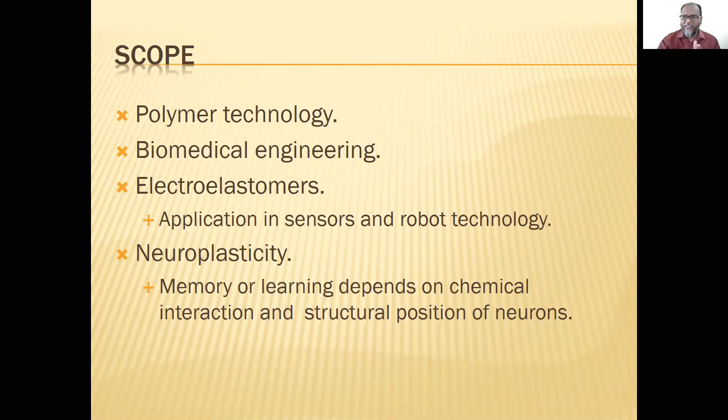How it is going to be is, suppose - actually it has been said that if you train yourself, suppose if I take a flute and play, that means we are training our mind. So short memory depends on chemical interaction of the two neurons generally. And actually the long memory depends on the structural change of these neurons. And imagine billions of neurons over there.

Nowadays I read one article that scholars and researchers are capable of tracing 200 neurons, whereas there are billions of neurons. Suppose if at all we have a model, it doesn't matter what kind of force is taking place - the force may not be mechanical force, it may be a chemical force or some kind of force. You have to understand what exactly is happening.

And then in 200 years, understand that we may reach to the Mars - now we have already reached. Maybe from here, 50 years after, when the capabilities of computers rise, people can model this very simply.

So what I'm going to say is that the structure changes. So if at all we are capable of modeling this structure, immediately we can define how a man thinks, how memory works - we see so many advantages over there. Of course, we never get the advantage to find out the right thing. That's how modeling is what we call dominating.

We mechanical engineers nowadays are no more working with bolts and nuts. That trend has changed - now we are entirely entering into the medical domain. And if you invest your time properly, take it from me, you can reach a good stance. But only thing is, enthusiasm must be there, and proper atmosphere must be there. Yeah, with this, I would like to start my what we call thing.

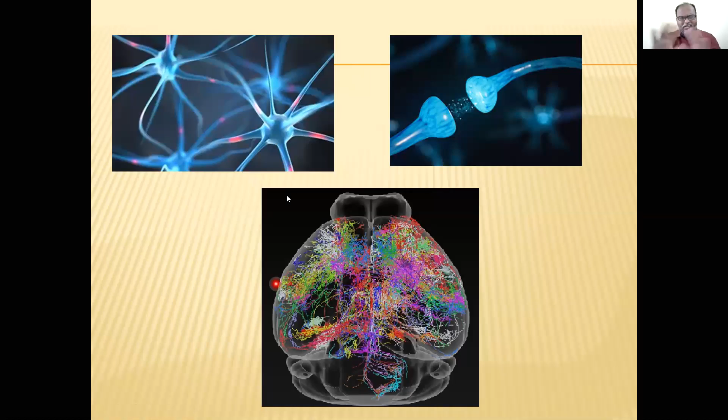Let me recall some basic strength of materials so we have that glimpse, and the preliminaries of continuum mechanics. I'm not going into the in-depth of continuum mechanics, but I will give the necessary information required for the modeling, and the introduction to nonlinear elastic material, where it is going to be, how to model.

The major task in this entire seminar is going to be how we have to model, and what are the formulas to be used. Of course, at the end of the day, people depend on the formulas, and what elementary precautions we have to take while modeling. Those are all I'm going to do.

I will use a little bit of code for modeling. I will give the code. Modeling platform you can take in any platform, either you can model in MATLAB or what we call LS-Dyna in console. Whatever programming language you are good at, you can use that. But the code is going to be the same. This is my code, it's not like you cannot use your own.

I had given some initial statement, and I will give the literature survey, a small glimpse of how to do the literature. Most of us at our graduation level, BTech level, have not been taught how to do a literature survey. Of course, if you've done your PG at NITs or IIT level, that would be entirely different criteria, you don't need to listen to this, you can do it yourself. But here I would like to give a little literature survey. I guess these points are good enough for us to discuss for an hour.

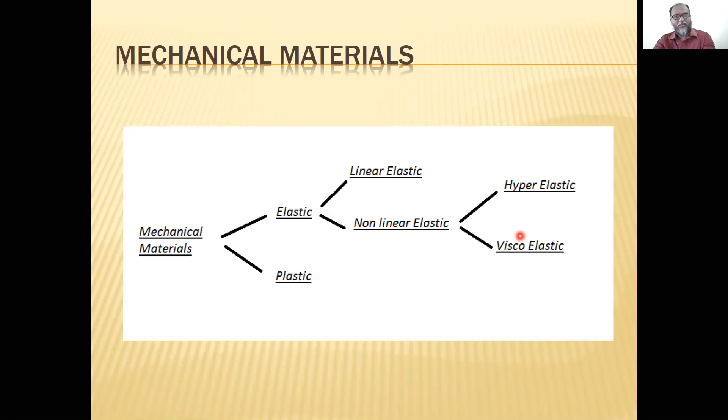The meaning of elasticity is that any material gives resistance for the applied load, or the response to an influence - instead of applying load, let me call it influence, because influence can be anything: electrical, mechanical, electromagnetic. If I consider plasticity, it can also be a force. So instead of taking a force, I'm taking influence. The material should show resistance to the influence, and when the influence is removed, the material should come back to its original position. That is basic linear elasticity: the relation between stress and strain must be linear, and we all know how to find the material property for this.

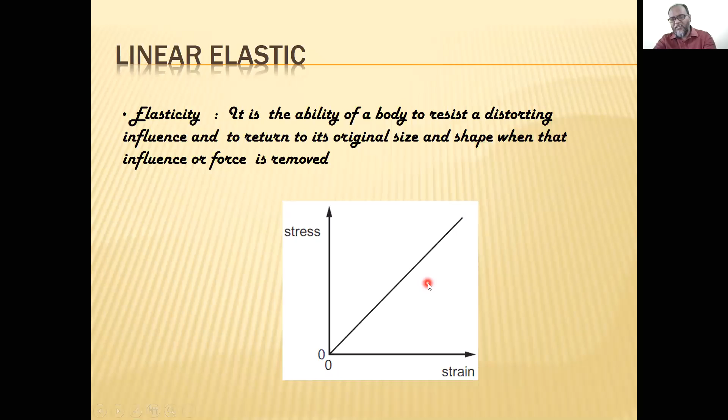It's very simple, what we call very simple. If it is linear, finding the slope of that line will give the Young's modulus. This is what we studied in our basic graduation.

Now what I'm going to do is the same thing, but using a numerical method. I'm going to take a linear problem so it will be easy for us, since those formulas are well known. I'll take the linear elastic problem and explain how numerical methods are used to calculate Young's modulus or material properties, instead of finding the slope manually. The same numerical method can be applied to any modeling - the coding will be the same, but the formulas, constraints, and how we apply them will differ.

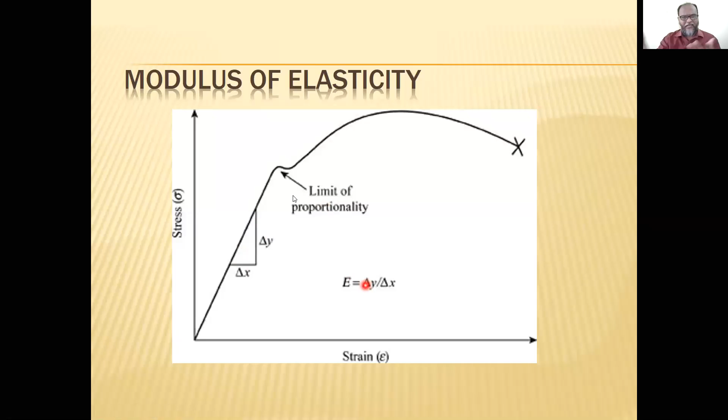Our task is to understand hyperelastic material. As we know, in elastic material the relation between stress and strain is linear. Nowadays materials have been developed such that the relation between stress and strain is not linear - for example, muscle and chewing gum. Any material, unless it is purely elastic, behaves as a nonlinear material.

In nonlinear materials, we consider large deformation. For small deformation, even looking at this graph, the behavior remains linear. So our task is to understand large deformations. When we consider large deformations, this all depends on the author - it depends upon that particular researcher or scholar and how they define it.

Most probably the standard way people define this is through the stretch ratio. Stretch ratio is nothing but the final length divided by the original length - it's a ratio. The length in the current situation over the initial length, so it's final length by original length. That's how people typically take it.

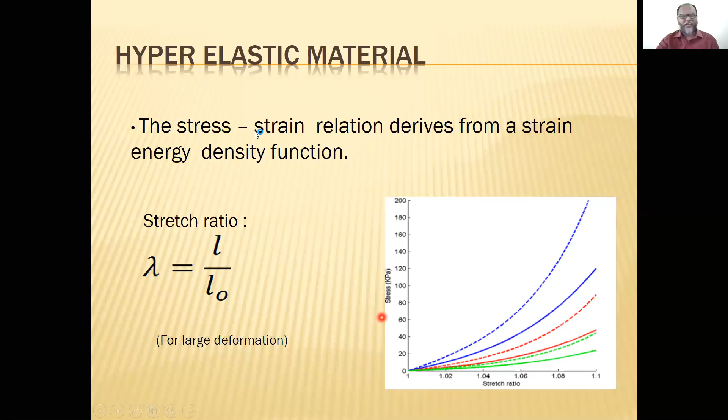One more class of material is the viscoelastic material. This is a very typical material, and all biomedical materials fall under this category. So if you want to shift your focus to the biomedical side, you always have to understand hyperelastic and viscoelastic materials. Let me explain viscoelastic material.

We understand that if you apply an influence to a material, it will expand, and if you remove the influence, the material will come back to its original position - this is linear elastic. Hyperelastic means if you apply load, it will expand, but the relation between the applied load and the influence is not uniform - it's not linear. That's what we understand for hyperelastic.

Now suppose we take the viscoelastic material. There are two ways we can understand whether a material is viscoelastic or hyperelastic: one is creep, another is stress relaxation. Let me go a little slowly.

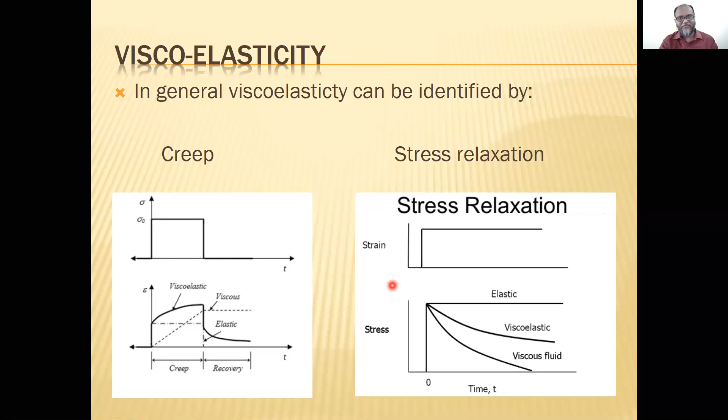I guess we've covered the information for viscoelastic basics. Now it's time to understand continuum mechanics. Continuum mechanics is a very important topic nowadays. If you want to model, we need to understand continuum mechanics. It's a huge subject - people spend their lives understanding and developing this theory.

Before proceeding, you need to understand what continuum means. If I take a material volume, and take a small volume within that, and reduce this volume to zero in the limit - this is very important - we should not end up with a void. So that means we are dealing with materials at the large scale, the macro scale. That is called a continuum.

Generally, materials are not like that. What scale you deal with depends on your interest. If my interest is at the structural level, at grain size, then I have to go for the micro scale. Molecular dynamics is the subject which gives information regarding structure, grain size, how atoms behave. If you're looking at the nanoscale, the atomic scale, then quantum mechanics gives the entire behavior at the quantum level.

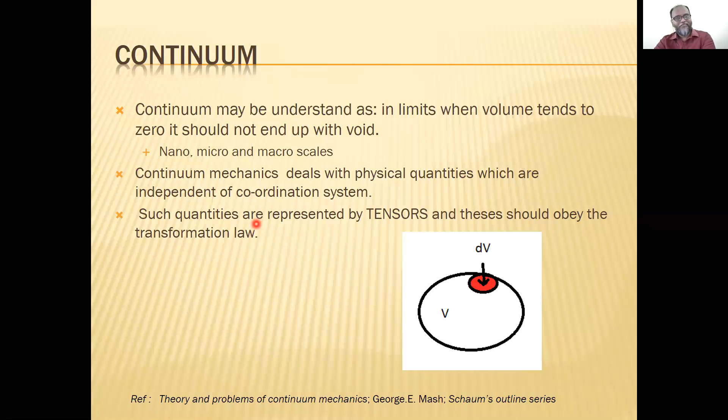Before proceeding, let me explain the meaning of tensor. We've already dealt with this since childhood - we have been dealing with vectors. We've studied mechanics, force, displacement, balancing - these are all dealt with using vectors. It's nothing but one part of continuum mechanics. We are not new to continuum mechanics - right from the beginning we have been understanding it, but the way we dealt with it was different.

Now, in three-dimensional space - here the 3 means, actually I should have put R, R means the space we are looking at - generally if we take three-dimensional space, the number of components to define a tensor... suppose a vector, how many components do we require? 3 components. Let me give an elementary example - for a vector, how many components do we require? 3 components. So every tensor requires a minimum number of components to define them.

The number of components required to define any tensor is 3 to the power of n, where n is the order of the tensor we deal with. Suppose zero order means nothing but scalar. If the order is 0, then 3 to the power of 0 equals 1, so the number of components required to define a zero order tensor is 1. It is nothing but scalar.

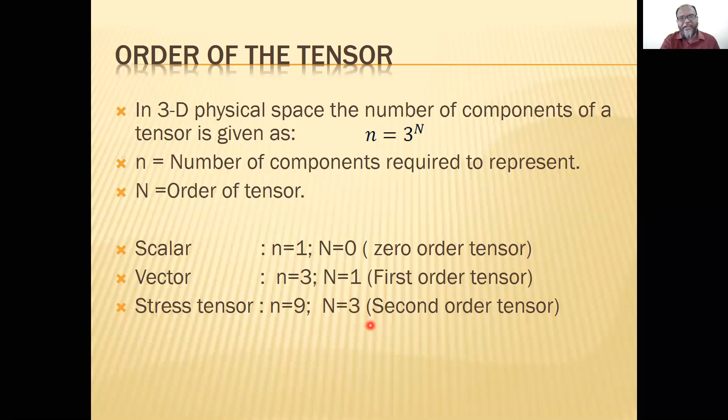Before proceeding, I would like to give a little insight into what exactly the tensor is, and how it looks mathematically. Suppose we all know the dot product, we all know the behavior of vectors. I don't have to go deep into the behavior of vectors. Suppose if I take 2 vectors, you have to bear with me through this mathematics, because without understanding this we cannot proceed. Even though it's boring, you need to bear with me.

Suppose if I take 2 vectors and make a product, I'm not defining what product it has to be for the time being - I'm defining a regular product. Regular product means how many components will I get? 9 components. Remember, still the base, the axis, the coordinate system is same - IJK here, also IJK, the coordinate axis. This is the misinterpretation general people used to make.

If the dimension changes, people may think the space changes. Dimension doesn't mean the space changes - the components required to define them may change. Here the dimension is 9, but it doesn't mean that your space changes. Space remains 3 only, but the basis required here to define is II, IJ, IK, JK, like this - 9 components.

If I define the product of this as a dot product, then what happens? We all know dot product: the product between I and I is 1, the product between I and J is 0. So that means all will be eliminating, and only one thing will remain - that is nothing but the scalar. Very simple, what do you understand?

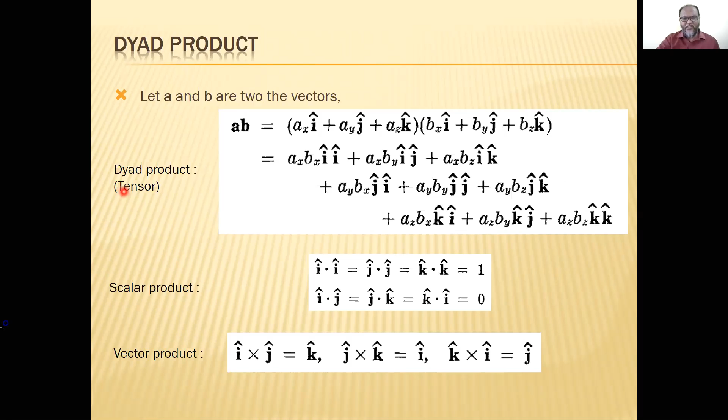We would have a glimpse of how the tensor is going to be. Actually, this is the basic elementary definition - this is not how we are going to define this going forward. In indicial notation, this is the reference - whatever reference has been taken is from the theory and problems of continuum mechanics by George E. Mash. You can refer to this for all the information I have given here.

Indicial notation is also very important to understand, because when we deal with large components, it will be very difficult to put them in a mathematically easy format. Thanks to Einstein, indicial notation lets us represent these in compact form. I would like to give you a glimpse of that, and then we'll proceed.

To define a tensor, we cannot use any parameter more than this. We cannot define an index more than 2 times, meaning we use it only twice. This is physically required because otherwise it loses physical meaning.

So if an index, meaning the small alphabet here, if I put an i, we call it an index. The index repeats 3 times because we are in 3-dimensional space, so the index takes 3 points. So if I put i equal to 1, 2, 3, that is A1, A2, A3 - that's how we define our vector: X component, Y component, and Z component.

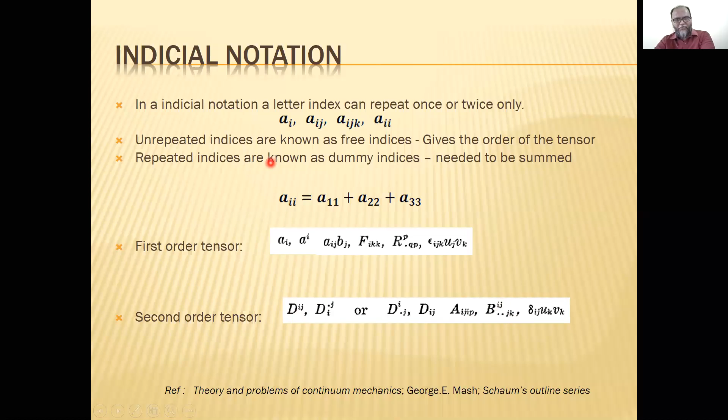I'm not going to go into the mathematics or algebra of indicial notation and all that - I've just given you a glimpse of it. That's enough, I guess, because we have very minimal time to understand this. Yeah, this is very important.

Some authors are not comfortable saying stress is a vector. So there is always some confusion about whether stress is a vector or a tensor. That clarity must be there.

Actually, if we are calling stress a vector, let me define how it has to be. Suppose I take a body, and on this body different loads have been applied. P can be a distributed load, or any kind of load and reactions being applied.

We know how to define stresses. In general common sense, at the elementary level, stress is defined as force per cross-sectional area. Actually, the defining of stress is such that if loads are acting on a body, our concentration is at a given point, because fracture propagates at a particular point.

So our point of interest is a given point. Suppose I want to find the resultant or reactional force of all loads applied at this particular point. To understand this, I cut a plane through that point. These plane directions can be infinite, since infinite planes can pass through a point, and the choice of plane depends on its normal.

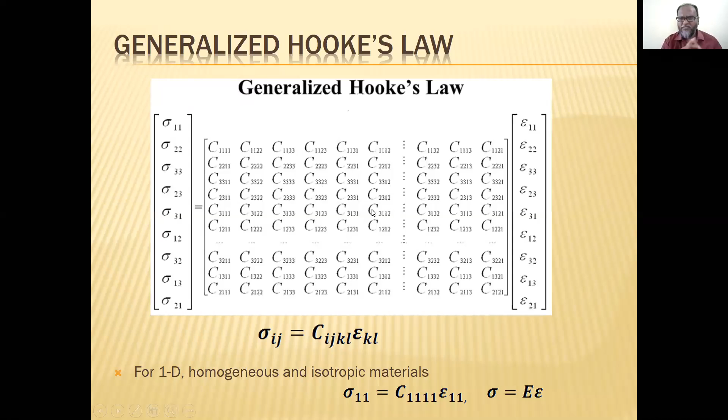Now I guess I had given enough basic information regarding the stress tensor, in order to find out the mathematical properties.

So we have to develop constitutive equations for the materials, to describe the behavior for the mechanical response. That's the task. So for that, we need to develop equations, constitutive equations. These equations are based upon the transformation law. That's what I said, our tensor needs to behave according to transformation laws. That's what we have been looking at for the past hour.

Suppose to understand the constitutive equation, it's deformation to some particular terms, and this is a subject on its own. We cannot define everything in a given hour. Still, I'm trying my level best to give it as simply as possible.

Now I am taking a body over here. Let me assume that this particular body, before applying load, is here. So I can call this the undeformed configuration, or the reference configuration. I had applied load stimulation.

Now here we are no longer talking about mechanical load. So some stimulation, that stimulation deforms the body. That's deformation theory, that's what I said, we are dealing with deformation theory. Suppose this body is deformed, the point P comes over here, point Q comes over here.

So this is the initial position, the reference configuration, and this is the current configuration. The current configuration point comes to this particular point, if I fix time at a given instant. So how the vector component behaves here is going to be important.

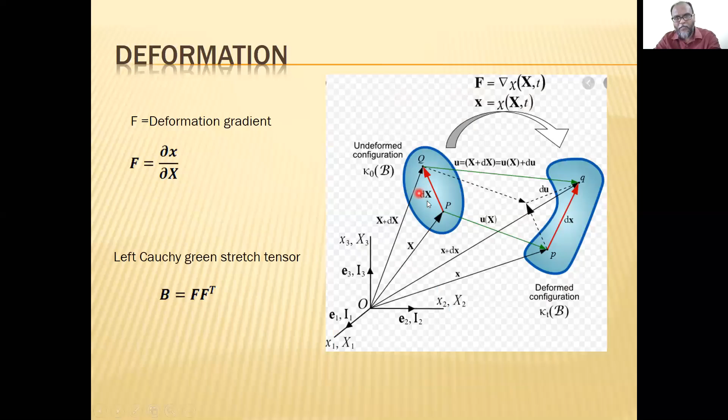This condition is in the initial condition before applying load. Generally I should say this one is in the reference configuration at time equal to 0. This is in the current configuration, when time equals t, when load is applied. So this has been transformed to this point. So this is the displacement function, how it has been expanded in the current configuration. From this I can get F, and from this I can get B. B is nothing but F F transpose.

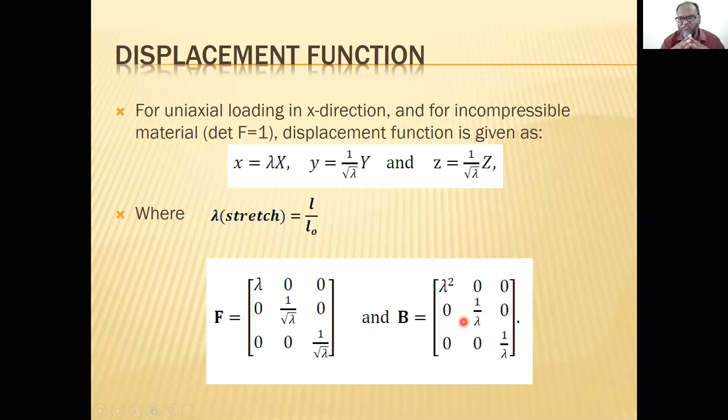Stress tensor. Because we've been developing these equations based upon balance laws and thermodynamics, up to now no balance law or thermodynamics law is violated. That means whatever material obeys those balance laws and thermodynamics should obey these formulas. But how we approach and utilize that depends upon energy functions.

So that means once you define this, psi can be a function of stretch - already defined stretch, right? This stretch can be a function of stretch invariants. One more point I have to define here is invariance. Invariance means no matter how you transform that matrix into different coordinates, the invariants will not change - it will remain the same.

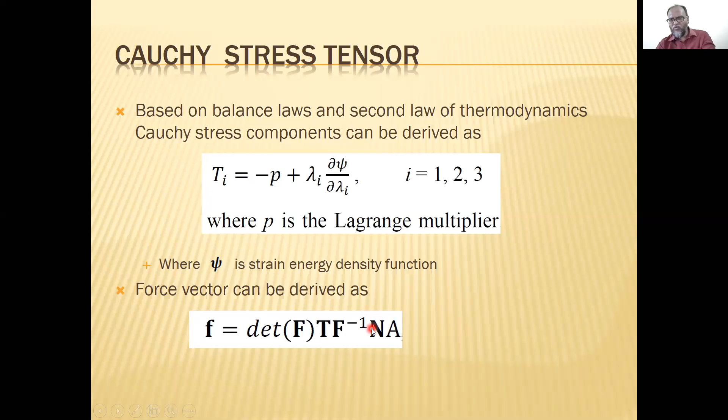Now it comes to the modeling. As I said, we are going to deal with modeling. We've given a glimpse of how an equation takes place. Let me proceed with a simple linear elastic material - as we all know, stress is proportional to strain. I have to find the slope of this particular line, and that will give the elastic material. This is what we've done at the undergraduate level.

We are trying to solve the same problem with the numerical method. I've taken this example so you'll understand this formula, so we can understand how we are using the coding. You can use the same concept and same coding no matter what - only thing is you have to change the force formulas. If you refer to any standard textbook on computational mechanics or linear elasticity, you'll find a wide variety of formulas.

And for hyperelastic material, you can find a wide variety of formulas, and you can develop your own formula based upon your material response. As I said, materials behave in different manners - you can develop your own material formulas for how the response takes place. So I would like to explain this particular thing using the numerical method.

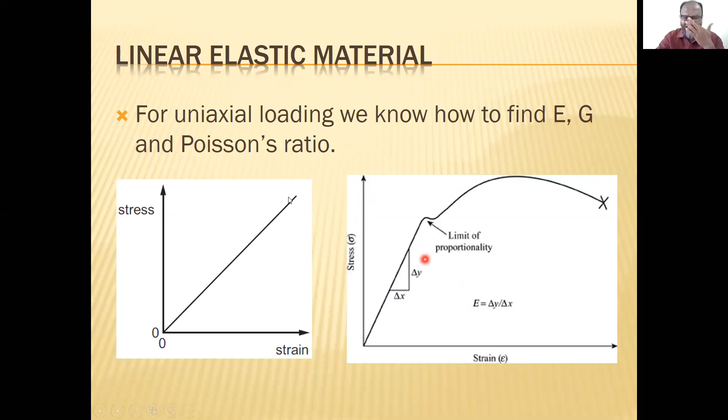I have taken some material, I have taken force - this is the force and corresponding deformation, which I had drawn. So force and deformation - this is not the strain. Remember, deformation is only how much the change of length is - simply speaking, I can say it's a change of length. The force and deformation graph suggests to me that it's simply linear elastic.

I don't know what it is going to be, but that graph says it's simply a linear elastic material. Since it's linear elastic, I can use our simple linear elastic material formulas. So how a numerical method can be used here is - the information I know is the applied force.

So I calculated force versus deformation - nothing, you don't have to worry about that. Take a material, take any rubber, hold it, add the spring load over here - the spring balance, or add the load over here, take a spring balance.

You can conduct your own experiments and publish papers on this. Take any material, hook it over here, and try to measure deformation. Add 100 grams, or if you take a simple rubber, which is elastic and a very simple material, you can add weights in grams.

You can find weights, you don't have to refer to instruments to do this simple experiment. Do this simple tensile load, calculate the force and deformation, and plot it so you can understand how they behave. If it is not linear, then I cannot use the linear elastic form, meaning I cannot use Hooke's law. I have to use the hyperelastic material, which I will explain in later slides.

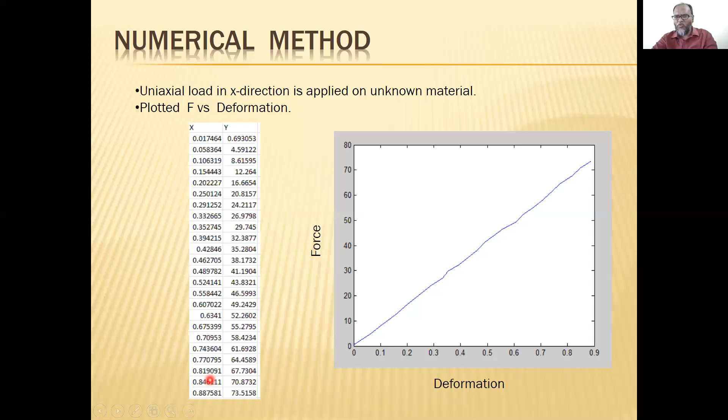Now look over here, the conceptual definition of force. That means elemental, one-dimensional, with A and a length known. So here the task is to find out Young's modulus. Now assume this value, any initial value, which can be 1 or 0. Zero means it will vanish, so you have to define a particular value.

You assume any one value, so let me assume 1000. And calculate force. Suppose this is the corresponding deformation for one value, then substitute it over here to calculate force. We are assuming this Young's modulus as 1000.

Calculate force. Now I'm using the least square method. This calculated value compared to the original value, then this force must be equal to experimental force. That's common sense, right? Let me repeat once again. These are all known to us. I'm assuming Young's modulus, and if my assumption is near to its original value, then my calculated force must match the experimental force.

So the difference I'm going to call error. Now I'm utilizing the least square method to define this error, based upon the experimental and calculated values.

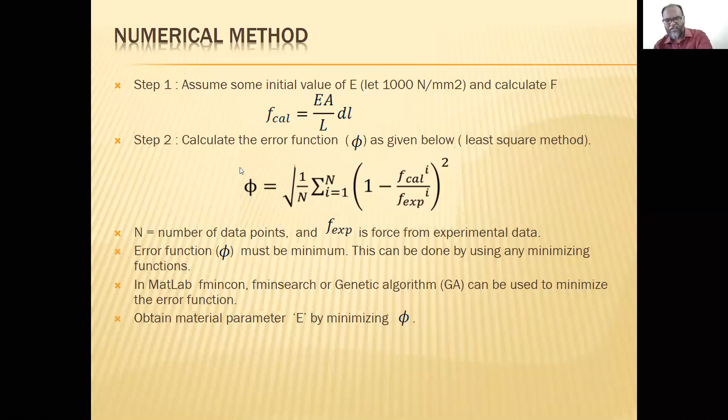It's working, yeah. Now this is what I had given as code in MATLAB. I can share this code with you guys.

Those who are related, the code is the same, but only thing is you have to change the formulas. You can use your own code, it is not like you have to think about it too much. See this one only, so clear.

Now look over here, what I said, we have to assume an initial value. Here instead of E, I define it as A. I have given some constant, so this constant I define as the initial value as A: 100, 1000, 10,000.

So I defined some function as LE22. What this function gives, this is what the function is. I named it as error. A take as input of A, input means here 10,000. This will take that input, and I define the diameter of the material I had been taking, so calculate area.

I know the length of that particular work sample, and S is nothing but number of samples. We had been defining the formula. N is nothing but number of samples. I define S as the number of samples, and I take in steps.

So I defined deformation and force from the experimental data. I gathered these values from the experimental data, and I calculated error. Initial error I had assumed as 0. Initial force I had assumed as 0, because when there is no deformation, your force also must be 0.

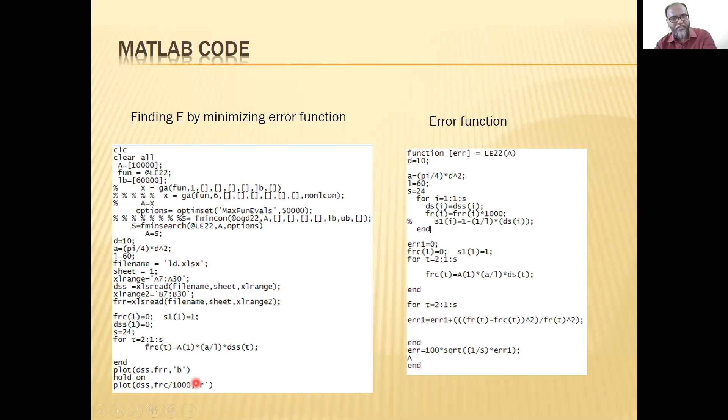I once again calculated using the optimized value. I recalled the data and used the same formulas, calculated and plotted the graphs between the calculated and observed values. And this is my case, so my model is almost all representing my experimental one.

So that means my code is working. So we have to understand, first of all, whenever you develop a code, this is the section of coding.

I had been given input to do this and give that input to you. What it has told me is, whenever you are developing code, check your code with the known values, known experimental data, known thing. Suppose if it is replicating your known parameters, that means we can conclude that our code is right.

It doesn't mean that if your code is right, your entire program is going to be right, meaning you are going to get the actual experimental result, because it's going to depend on a lot of factors. At least at the initial stage, you can figure out that your code is right. So here I decided that my code is right based on known experimental data.

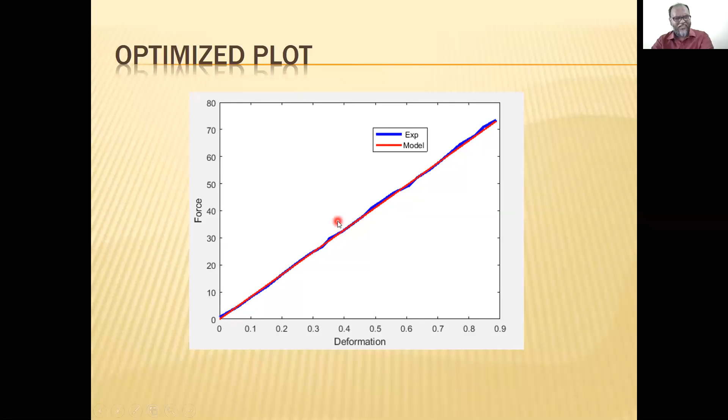This is the linear elastic material. Now I would like to, half an hour is there for us, which is good enough time. So now I would like to define the hyperelastic material. As we know, hyperelastic material means the relation between stress and strain should not be linear. We have a variety of models, and you can even develop your own model.

It can get complicated, that's what people say, because you have to study so many inequalities; those things need to be developed. So the task here: the basic hyperelastic models are Neo-Hookean, a very standard model; Mooney-Rivlin, very standard; Ogden, well-known; and exponential function can be useful.

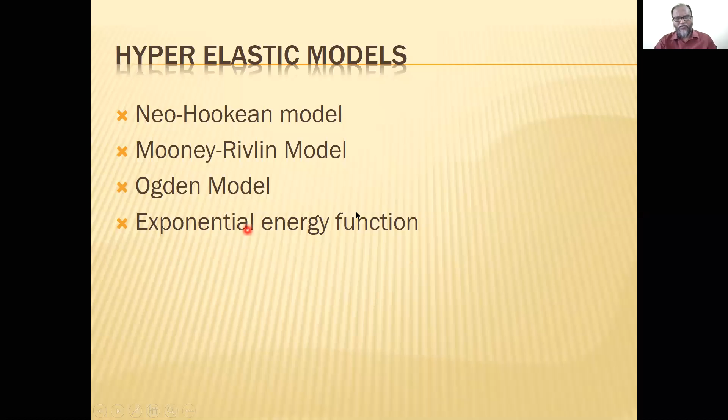I'm going to deal with this, and tell how these four models are going to take place. I said your strain energy, this equation, right? Your stress components will be based on this formula, based upon psi. If you define this psi, you will get your stress component based upon your input function. Input function here is lambda. I'm going to define my Cauchy stress function based upon my lambda.

Some authors will define the strain energy function in the invariants of the F matrix and B matrix, depending on the case. And P is known, the Lagrange multiplier, which compensates and takes care of the incompressibility.

So suppose if I take uniaxial loading, so my loading is in one dimension. If I take a body like this, and apply load, so my load is simple uniaxial load. There is no load in this direction, no load in the other direction. So that means all other loads are zero, all other directions are zero. So Txx will be a known value, and Tyy, stress in the y direction, will be 0.

I put the 0 value there, define it, and get the Lagrangian multiplier. To obtain the Lagrangian multiplier, wherever the direction load is not there, put that into this equation and get the Lagrangian multiplier. Once you know the stress components, substitute them in the force equation and you will get the force component. Now different models will use different pi function, energy function. Now we are going to look at how all these work.

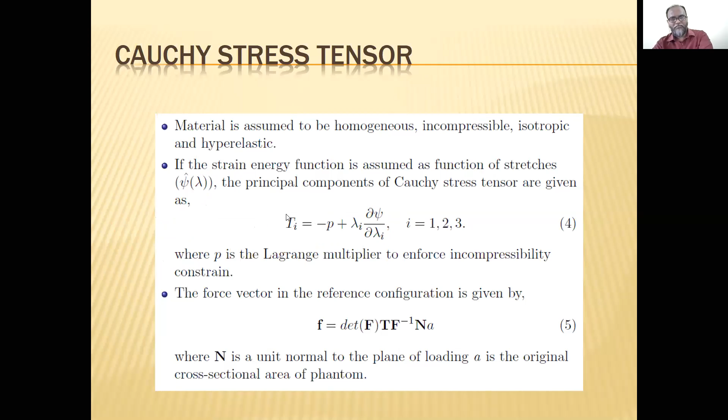Now look at this. I'm taking a simple Ogden model. The Ogden model energy function is defined here. If you closely observe, this represents nothing but a strain energy. These are Young's model terms - mu and alpha.

Strain stretch is not going to have any unit because it's length over length, and your Young's modulus is going to give this mu p, which is nothing but... we cannot call it Young's modulus. What we call it, they call it Ogden parameters.

Suppose if I take n equal to 3, repeating this: mu 1, mu 2, mu 3, similarly alpha 1, alpha 2, alpha 3. If I take n equal to 4, based upon that, the complexity of the strain energy function will increase.

Experiments show that n equal to 3 gives the optimum value for all hyperelastic materials, so I had taken n equal to 3. Once you know these Ogden parameters, your shear modulus can be defined.

As I said, this is the mu alpha, based upon these parameters. So once you know these Ogden material parameters, you can calculate the shear modulus.

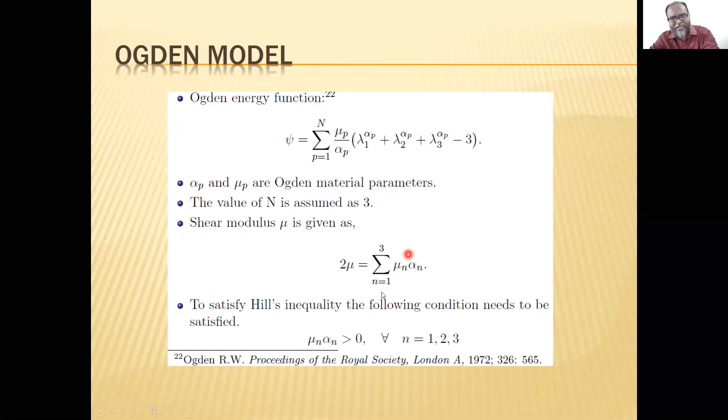Once you solve this, knowing the strain energy psi, I can substitute this in this equation and get the stress equation. Substitute the psi function here and get the stress equation - now completely in terms of lambda and constants.

So I have taken n equal to 3. How many constants am I going to get? Alpha 1, alpha 2, alpha 3, mu 1, mu 2, mu 3 - that's 3 plus 3, total 6 parameters I have to get from this model, from this stress equation.

The p value I calculated because I applied the uniaxial load. The P Lagrange multiplier is calculated based upon Tyy equal to 0, since I'm not applying any load in the y direction. Substitute over there to get the p value, and finally we'll get the stress, and corresponding to that stress you get the corresponding F value. Stress will be calculated based upon this.

Initially assume these values - the same numerical method we followed for linear elastic material needs to be followed, just instead of the stress formula being EA by L, now this is your stress force formula. If you know this, then the programming code is the same.

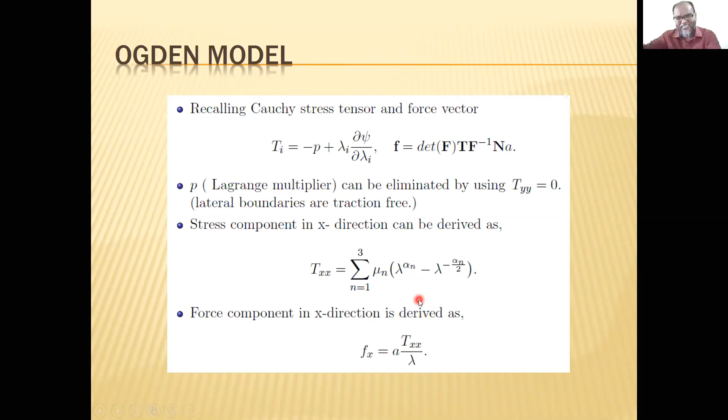F depends on lambda only, so that means obviously your B also depends on lambda. Finally, you will end up with the stretch. No matter whether your energy function is in invariants or in stretches, finally you will end up with the stretch equation.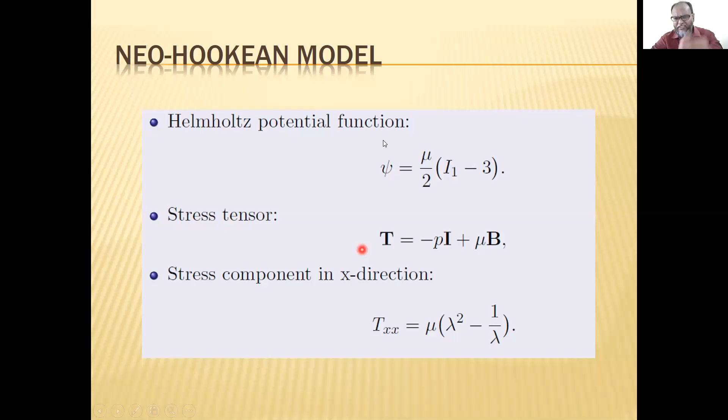The invariants of a matrix don't change no matter what coordinate system you use. If you transform that particular tensor to any coordinate system, your invariants remain constant. That's why the energy function must always be defined either in terms of stretch or in the principal invariants. You have to remember this.

Once I find the p value, your stress can be defined. Substitute here and do this, and finally your stress equation is obtained, from which you can calculate force. Similarly P can be calculated, because we are applying a unidirectional load.

If you are applying a two-dimensional biaxial load, you cannot apply y equal to 0; you can apply z equal to 0. If you take a triaxial load, then you cannot take the z-axis. Then if you want to calculate t, you can take the stress components and play along with them.

Once you get into the subject, you can appreciate the beauty of the subject, the beauty of the mathematics. So finally, the final equation is this.

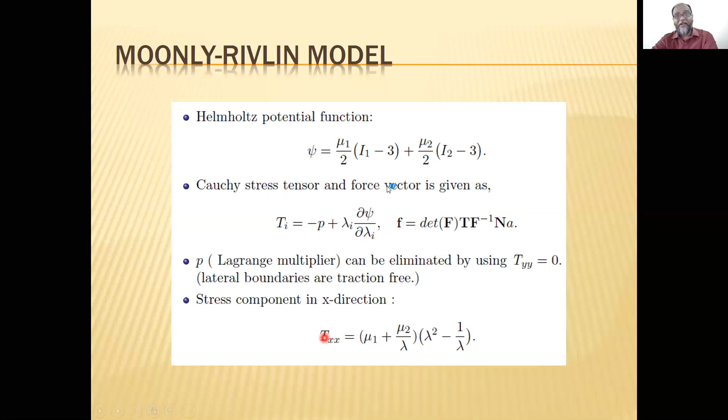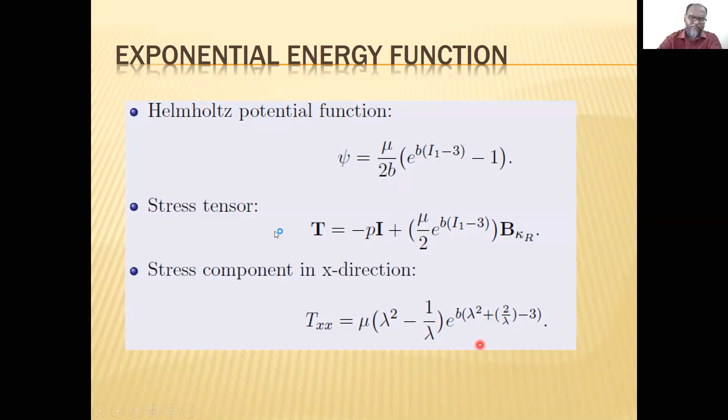What we had done is, we wanted to find out breast cancer using mechanical means, so we had to model it. We cannot conduct experiments on a real breast in real life, because that would be very, very difficult. So we wanted to mimic a material which replicates the breast, and we needed experimental data. Nowadays there are ethical rules we have to follow, so it's difficult to get such information. Luckily, we got one experimental dataset for the load and deformation of the tissue.

We mimicked the material like a polymer. We developed a material and fabricated it. I used all the models: the Ogden model, the exponential model, the neo-Hookean model, and the Mooney-Rivlin model. I used all these models and plotted the results. This is what I finally reached: it shows that the exponential model almost matches.

Of course, we are not interested beyond a certain deformation. So within my range, say within 10% deformation, it absolutely works, and all three formulas are acceptable. Beyond that deformation, for large deformation, it continues, but that can be taken care of if I tune it properly; it will be managed.

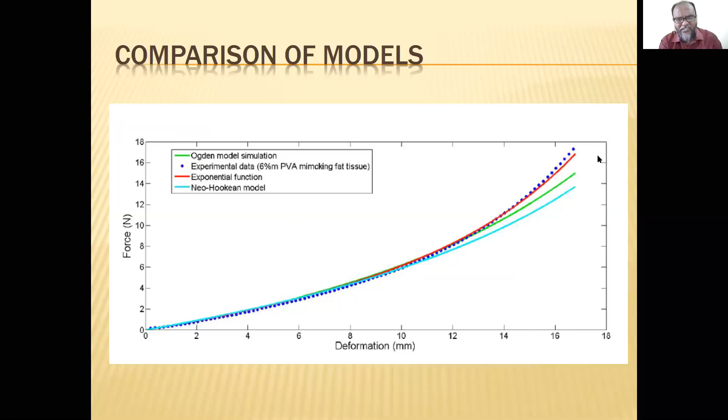Exactly, right. It's very simple. If I call it stress, it's force per cross-section area, as I showed. As I said, if we want to calculate the reactional force at a given point, that's what stress means for us. Suppose you apply a load on the entire body, my interest is on a given point. So if I want to calculate the entire reaction at that particular point, it's nothing but the distribution of force on that particular point. That is called stress.

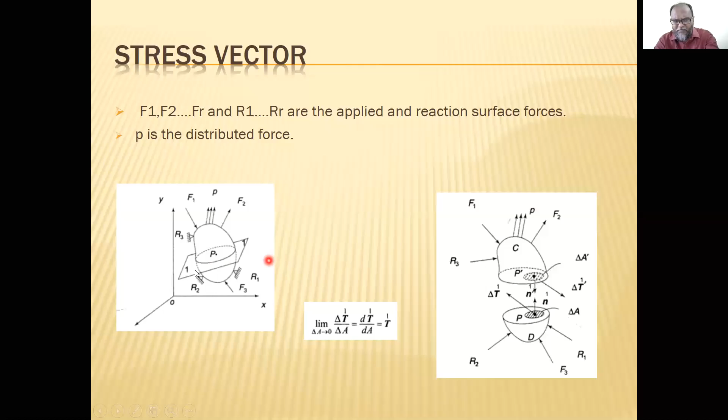General people call it traction. In what we call the continuum family, people call it traction; we call it stress. Don't get confused with the stress tensor. Stress tensor involves this force on one plane. I can get three planes, three mutual perpendicular planes like this. Suppose if I take a body where a number of loads have been applied, and I want to calculate at this particular point.

Now this is the x-plane, because it is perpendicular to the x-axis. All these forces are resolved onto this plane. Forces along the x-axis and y-axis can all be resolved onto this. Now, how many stresses are there? This is the normal stress, this is the shear stress, and this is the shear stress — these three components of shear stress. This particular component is the stress.

Now combining all three planes, how many components are there? Nine components. If I arrange all these nine components in a matrix form, that is called the stress tensor. I hope you understand the difference between the stress component — what we call stress vector — and this, the stress tensor. This particular value at that point is a scalar, not a vector.

This stress tensor is used to calculate the traction force on any plane. I want the traction force on any plane — the only thing I should know is the normal to that plane. Suppose this is the plane, and I have the normal to it; substitute this normal, and multiply it with the stress tensor. If I know these nine components of stress, substitute them, find the normal, and you will find the traction. Combining tractions is nothing but stress.